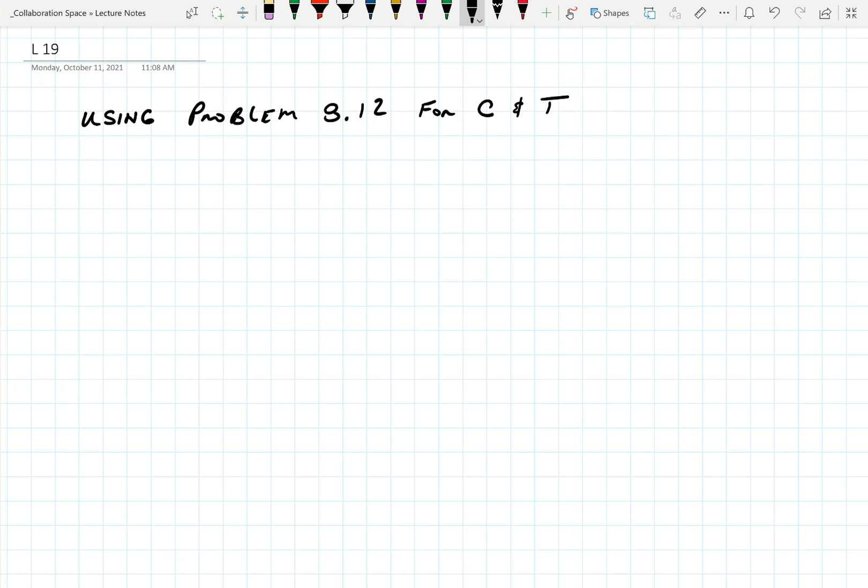All right, so using problem 8.12 for C and I. Determine...

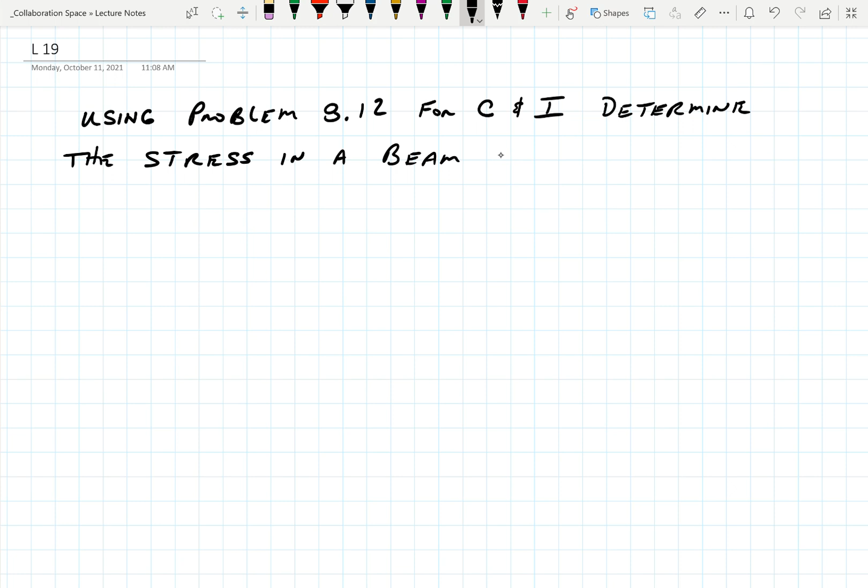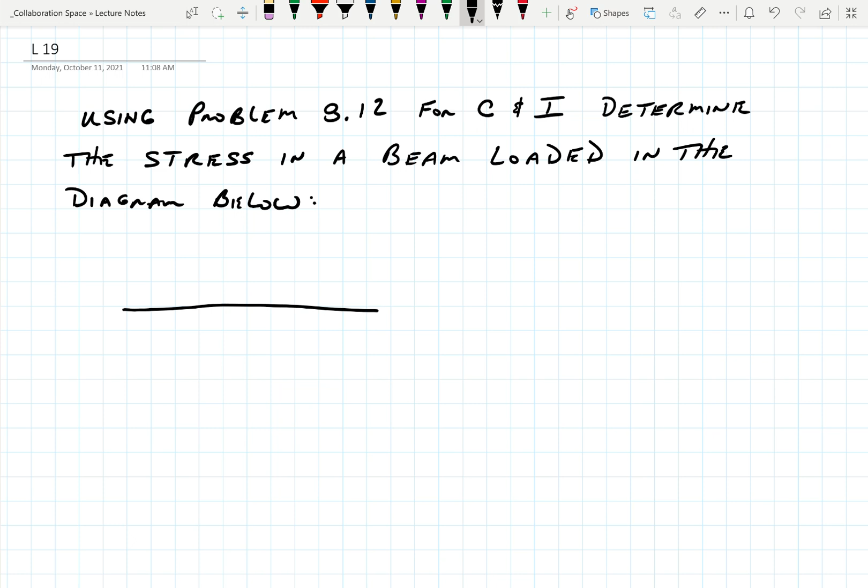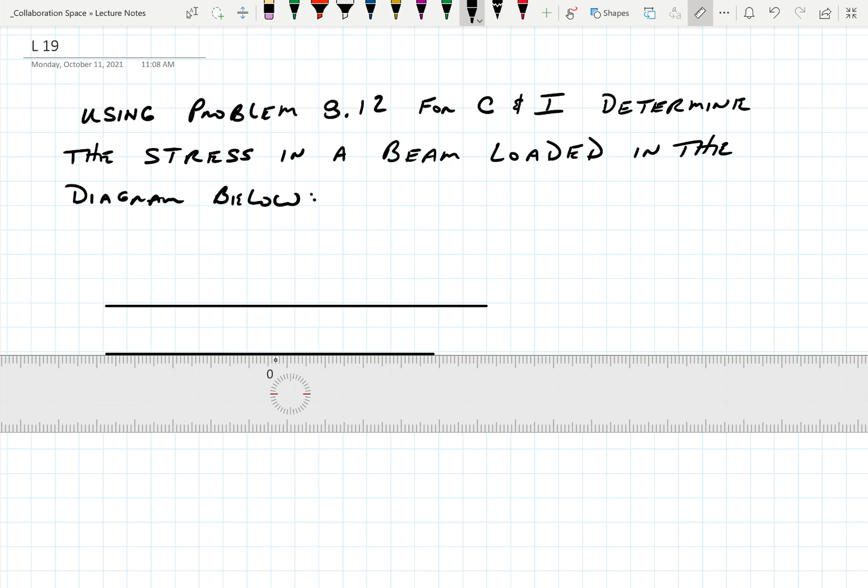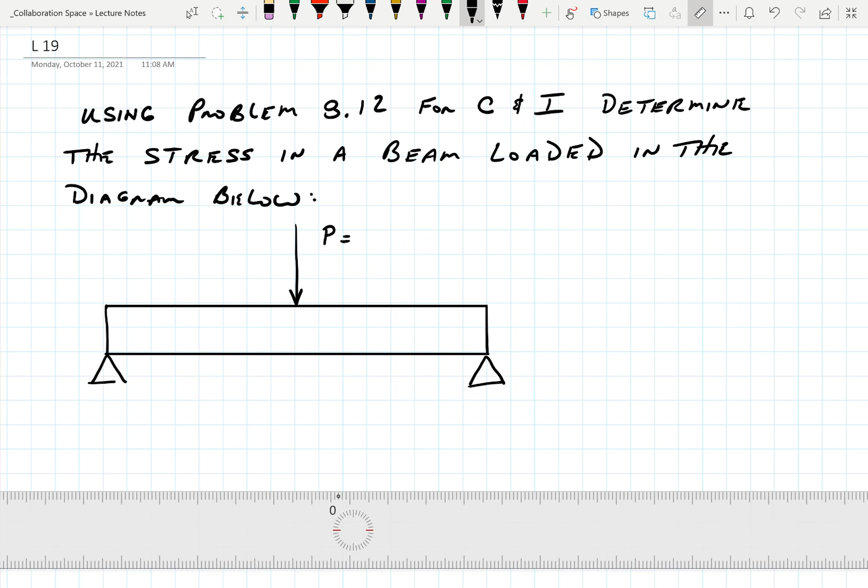Okay, so in this diagram, we are going to do this. I don't like that.

Okay, so we got that. So there's a bunch of things I'm going to introduce you to here. One is, let's talk about the reactions on this, okay?

Oh, I need a number. And we are literally making this up. Patrick, give me a number greater than 10,000 and less than a million. 19,496. 19,496.

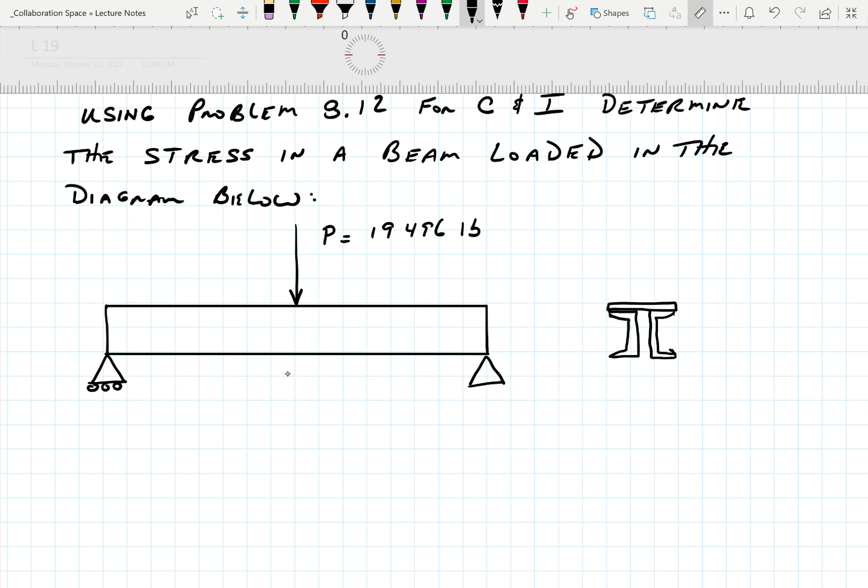Want to do pounds or you want to do newtons? Pounds. Okay. All right. Frank, give me a distance between pieces here greater than 25 and less than 50. 36. Okay.

So, first step to this problem is find the reactions. But I want to point out something here. So, based on the diagram of what I drew for the reactions, what are the two possible things I'm looking for? What type of reactions? Which directions can the reactions be? Force. So I got the force pushing down, P. Your reactions have to be what? You got to go vertical for the reaction of that. But because of the reaction type at the one end, what's that lead you to a possibility of having?

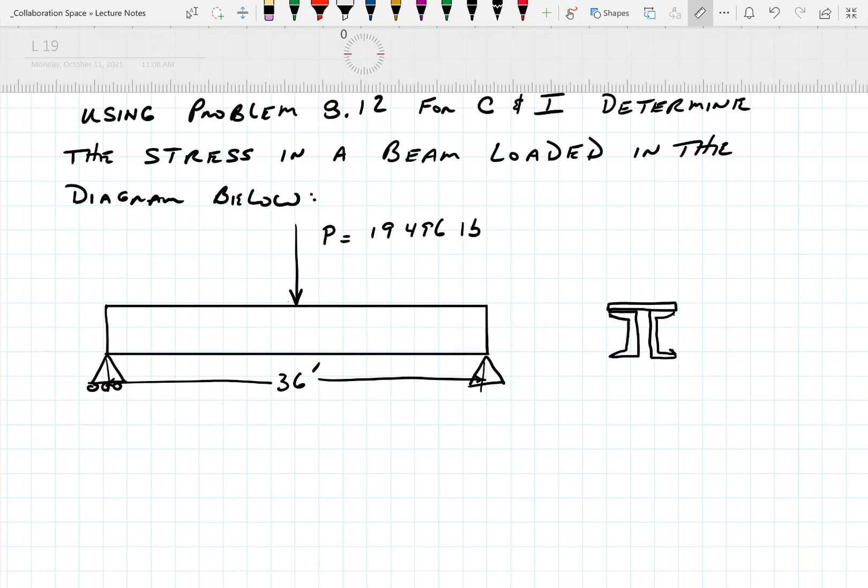All right, so very first thing: free body diagram, correct?

Is from that 19,500. We'll go with that. I want to make it interesting. Yes, you'll be using your calculator. Doing that in my head.

All right, so what's the reactions? Let's go back and do them the hard way, even though it should be pretty easy to figure this one out. But in order to solve for this, we got to do sum of the forces in the y equal to 0, and sum of the moments equals 0, right? There's no x, but you can do an x, okay?

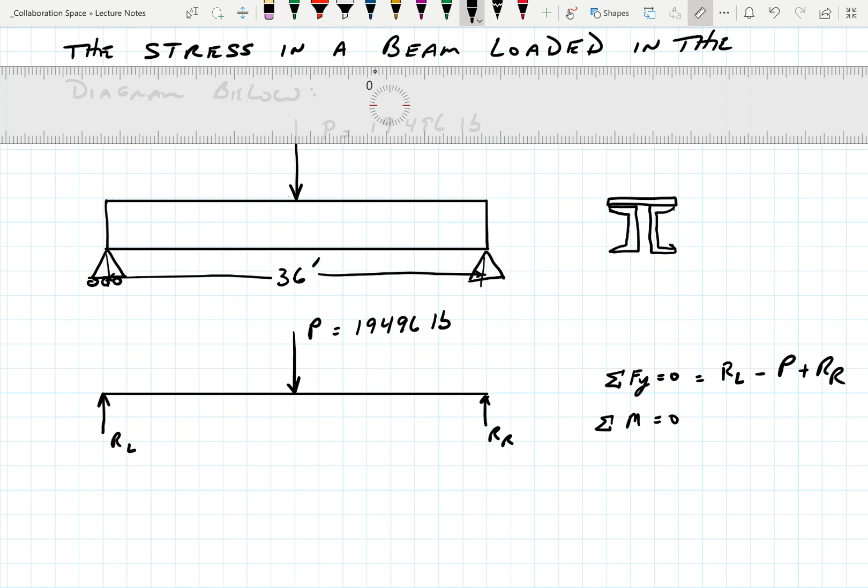So, can I solve for sum of the forces in the y? No. All I can actually do is write this: RL minus P plus RR, okay? So, it helps. Literally, that's the way, when I was a student, that I remember doing it, just because we got used to just doing it. But the reality is, I can't do anything with sum of forces in the x or the y. So, it doesn't help to have sum of forces first. So really the very first equation you should work on is sum of the moments, okay? And we can solve for those two.

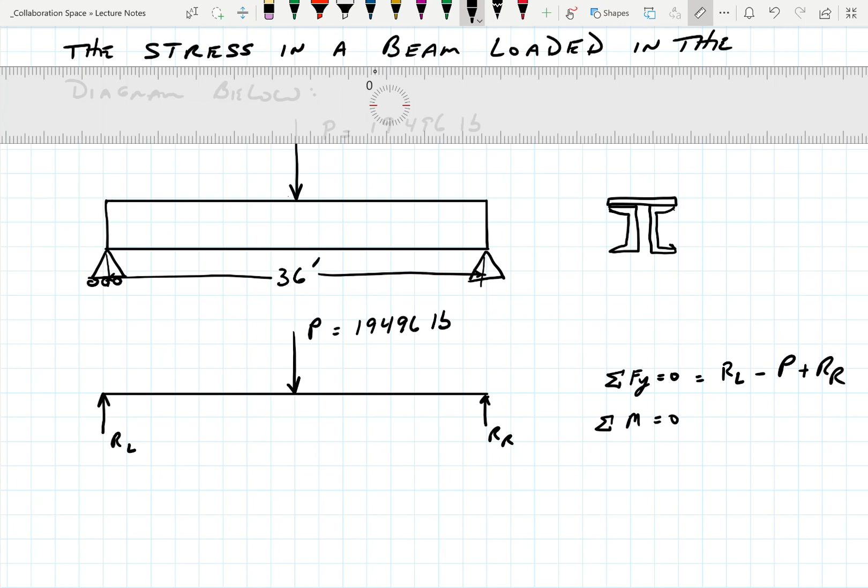Alright? So, first things first. So we got 36 all the way across here, which half of 36 is? 18. At least I was hoping it was 18.

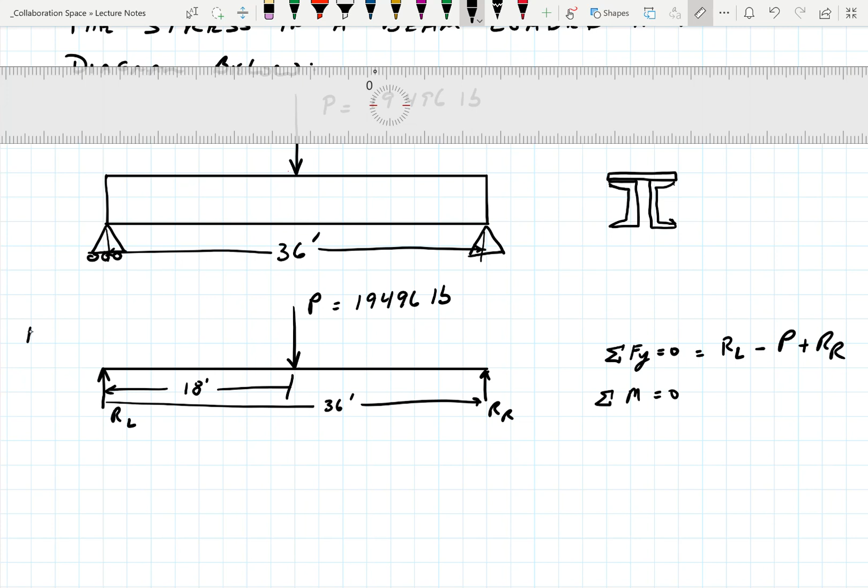Oh, by the way, why is this a free body diagram, but that one above is not? Go ahead, Henry. You're looking at me like you know. I only have the forces shown, don't have the actual physical reaction to it. They see that? He lives.

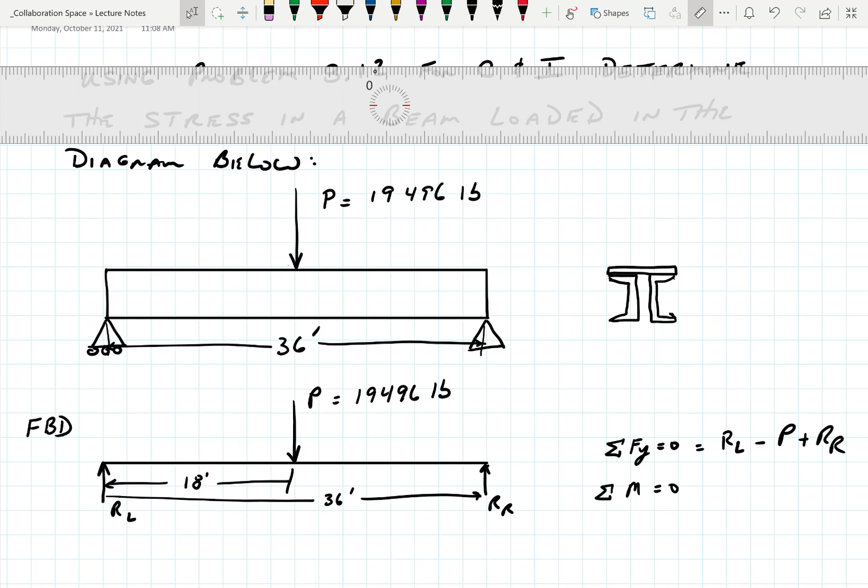So that being said, always, without fail, draw a free body diagram.

So the cool part about this is now if we do the sum of the moments, we are actually looking for P. We know you got to pick one of these to be the pivot point, and I'll give you a choice. You can choose right or you can choose left. Choose one. Let's see, Emma, pick one. Left. Okay, so we're going to do sum of the moments about RL.

Now the other bit to this is we want to make sure we choose a rotation to the moment. You can choose any way you want. Actually, in all fairness, I should have let you choose. Montana, would you choose this one? Yeah, rotation about RL.

Like, even clockwise, I pick clockwise. Would you pick clockwise or counterclockwise? Anybody go counterclockwise? There's no right or wrong with this answer, by the way, just whatever your preference is. So as long as you're consistent and watch your negative signs, everything's gonna work. Okay? If you screw it up, it's because somehow you mess something up in the algebra.

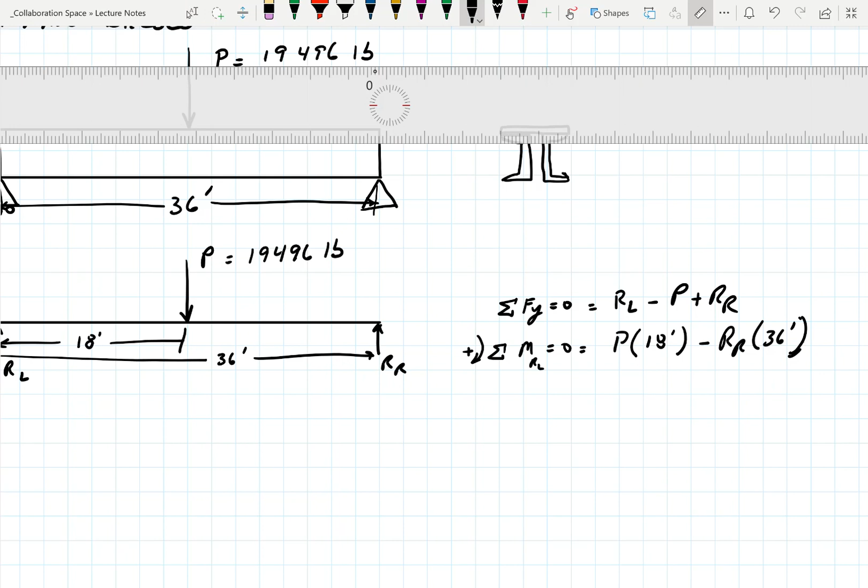Is P positive? Yes. So if you like, you can put it in there or you can leave it blank, just whatever helps you remember the rotation bit. Okay, all right, so we're going to solve for P. P comes over to this side of the equation, and it's equal to RR, 36 feet, divided by 18.

Oh, sorry, working that backwards. We know P, don't we? I'm going to do this. 19,496 pounds times 18 feet minus RR times 36 feet. That way we actually solve for the right thing.

RR is that: 19,496 pounds, 18 feet, divided by 36 feet. Okay? Cool, now I got the right problem. I don't know why I was solving for the force, because I left it blank.

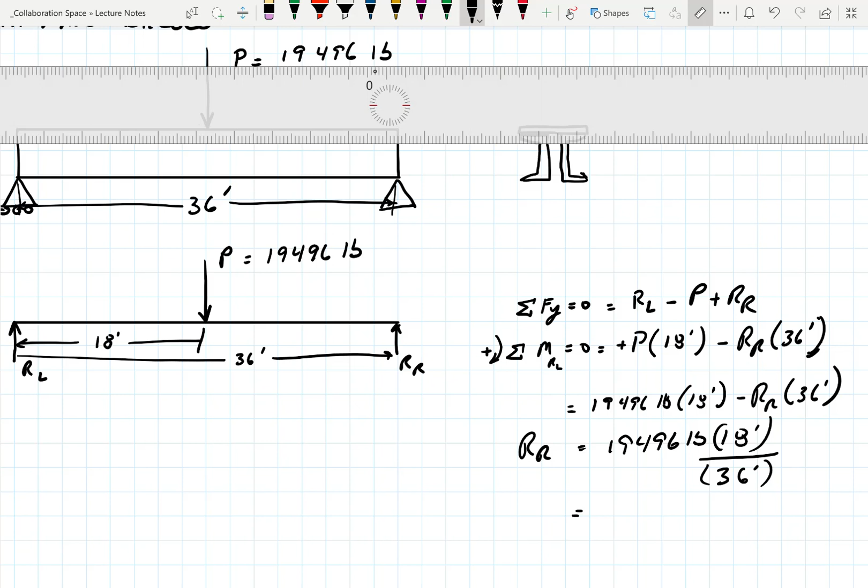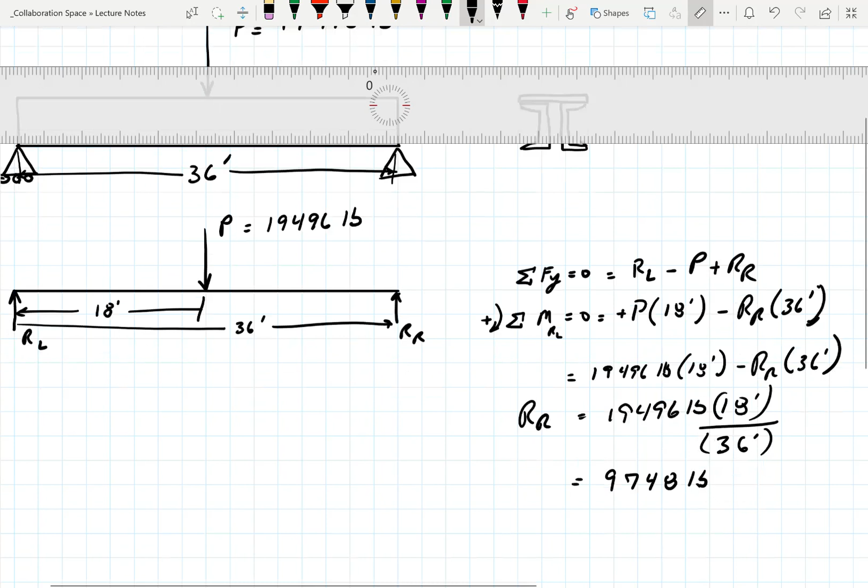So what do we got for an answer? 9,748 pounds. Okay? And then ultimately, you should go back and do sum of the forces in the y equal to 0, equal to RL minus P plus RR.

And we're going to get minus RL plus P minus RR, and we're going to get 19,496 pounds minus the 9,748, and that's going to leave us 9,748 pounds. Okay?

So we got our reactions now, right? Everybody good?

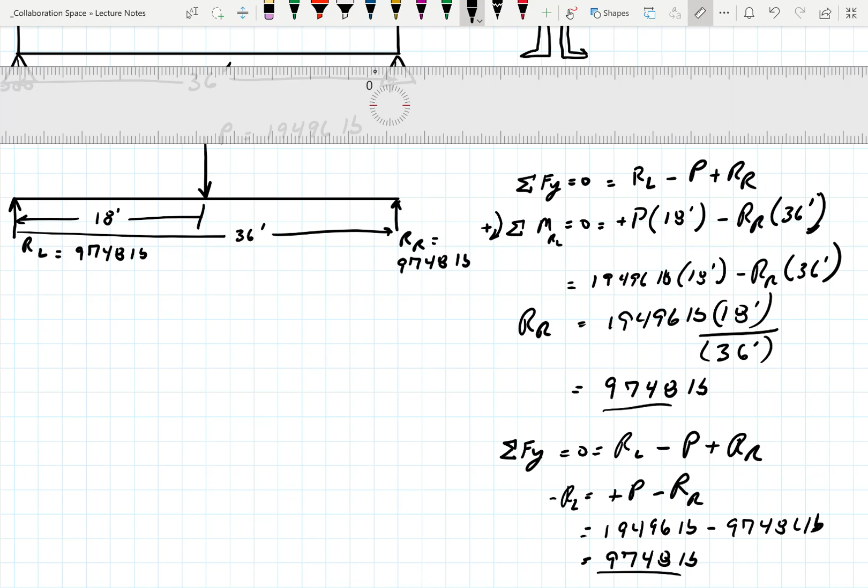Alright, what happens if there's two forces on the top? Remember all that? Well, we take them all in series and we just keep doing the math, right?

Everybody okay? I mean, I picked an easy one for this problem because what I'm going to do next is going to drive you nuts. So I want to start with something simple. Okay, alright, so cool.

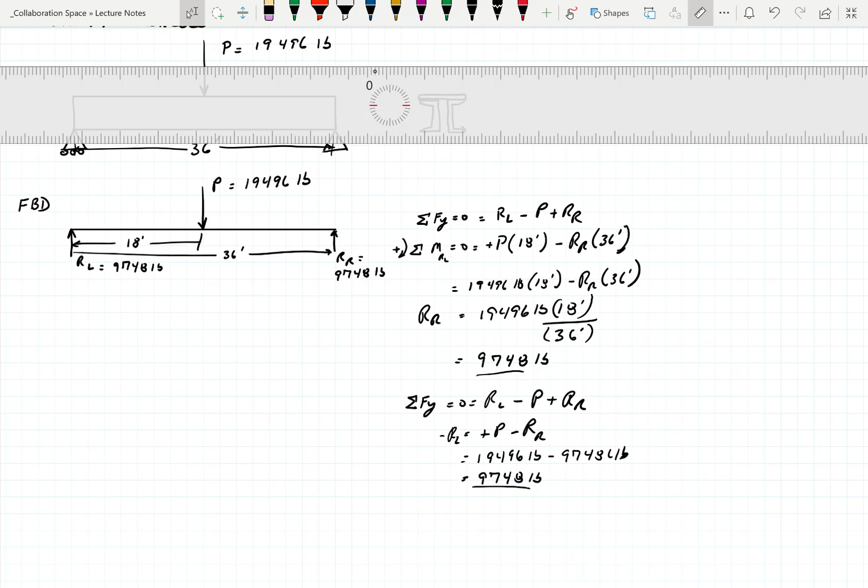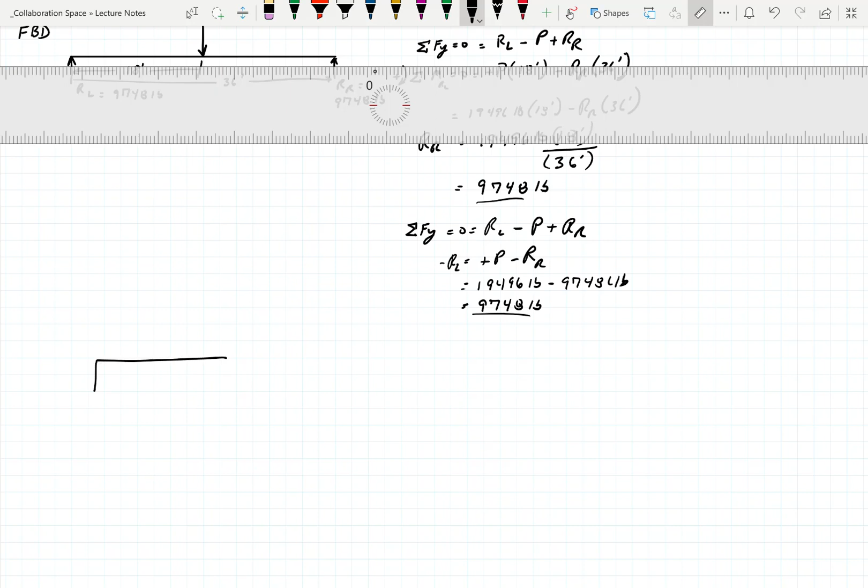All right, so that's our reactions. Now let me do this for a minute. And then we're going to come back and do some drawings of this thing. Oh, I guess I need this.

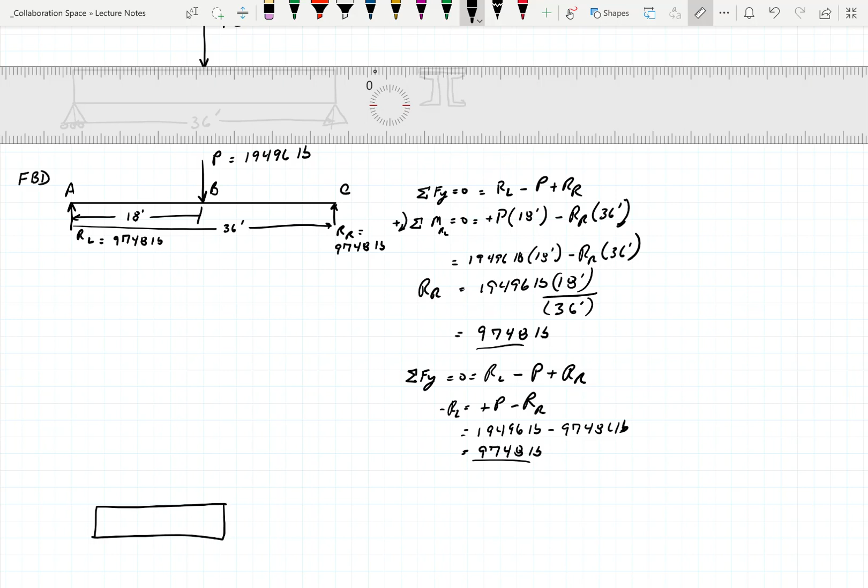I'm going to put an A there, a B there, and a C there, so we got some points of reference here, and you can come out of the way. So this is A, and this would be RL, okay? And this is B minus, okay? So if you think about this, it's B minus, okay? Just before the force. All right.

You don't have to do this in a couple of days to get the hang of this, but I'm going to break it into really small segments as we do this. So if I have a force at B, that's the 19,000 pounds, and I'm trying to figure out what's going to shear. I want to know what's going to happen just before the force causes the shearing.

Do you remember the shear stuff we did back in the beginning someplace along the way here? God, it wasn't that long ago, although it feels like 900 years ago. But that's anyway. So that force at B, we'll want to try and slice that beam in half. Someplace out here, I think I'll do it like this.

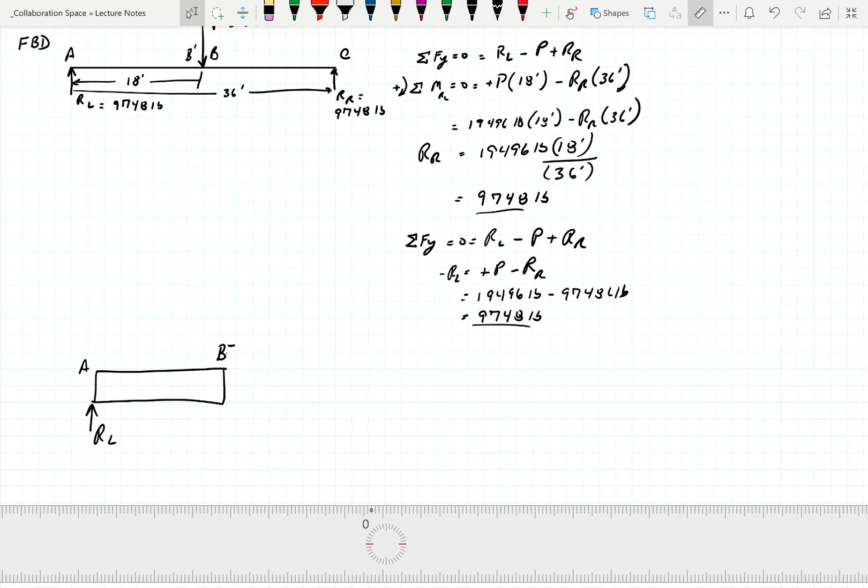We'll put a red mark—there's just a little bit of material left out here. That means we have this fictitious force out there, P. And that's really at B.

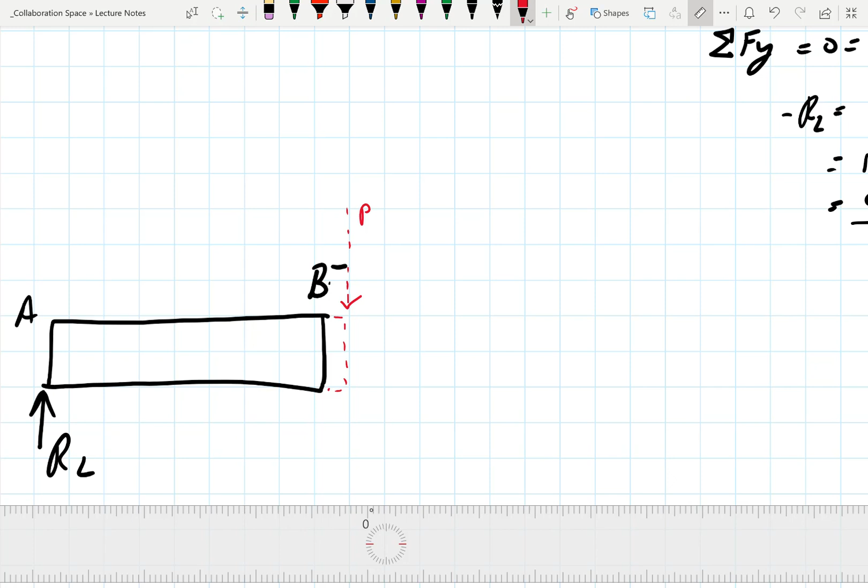But just before that point, what's the reaction there? Is anything happened to that? We just cut it, or just imagine it beforehand. It should be the reaction of RL. So literally what we're gonna do is this.

So watch where the fun comes in here. I want to draw up here—no, I'm gonna do it here. We will start right here. Oops, let's do black.

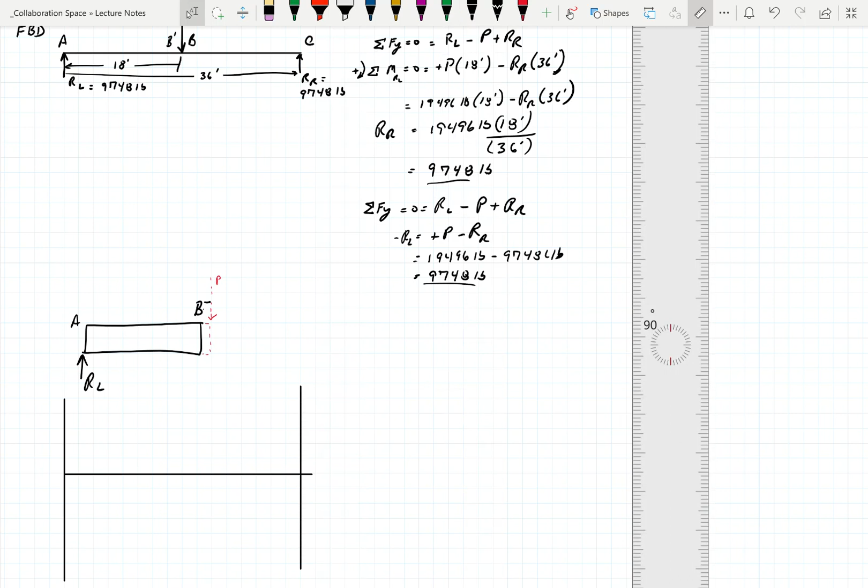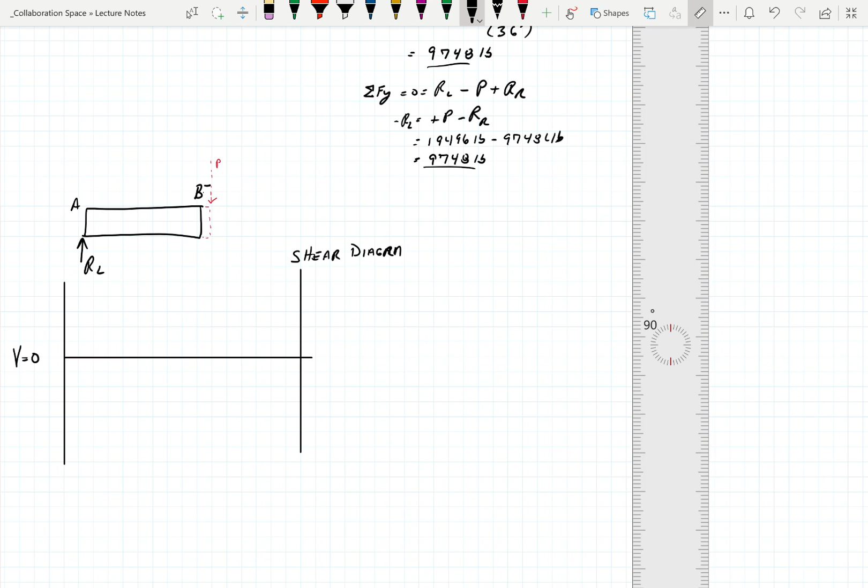So this is a shear diagram. We start at 0. At point A, here, let's do this—we go up. No, let's make that bolder. We go up, and then we go over until we are here.

So everything across that beam until that point of B. So B minus, or B prime—no, what did I put it down? I put B prime. B minus is above B prime. B minus, so just before B happens, the force at B. Everything still stays the same. There's no other forces acting on that.

So the uplifting force of the reaction is going to lift that whole left side of the beam up until we hit the force at B. Then it will start going the other way. Cool. Now we can actually calculate that.

So we want V at A, which is really going to be RL, equal to 9,748 pounds. It's the only force acting there. So literally it's going up to here at 9,748, and I usually put the units down here so you don't have to fight with it.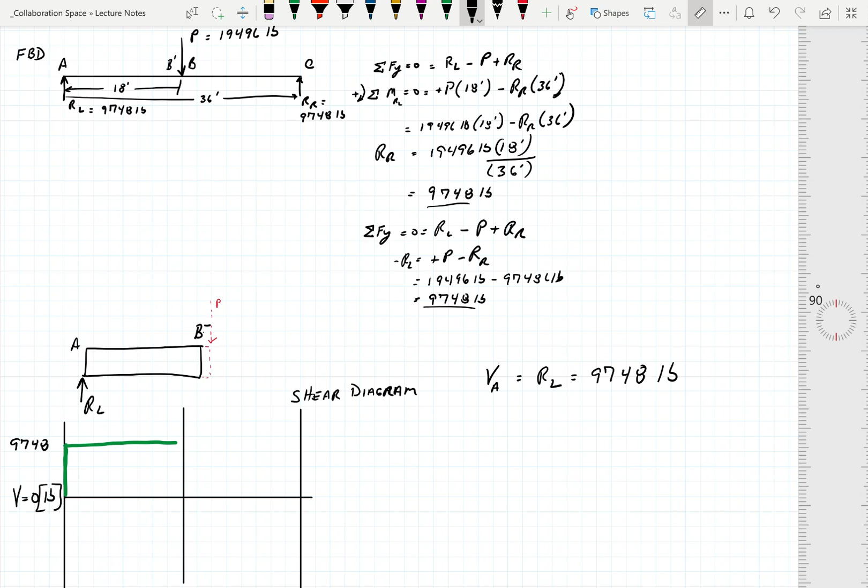But when I get to V B minus, we're still equal to RL, 9748 pounds. But here comes the kicker. So here's VB, and it's going to go to VB minus, and we got the P now. So VB minus is positive, and P is negative because that's the direction it's going.

That reminds me, I didn't do that up here, did I? That's positive. So identifying which direction is positive so you know how to get your signs up.

So now I'm right at the point where P's acting on this beam and it's going to slice through it. Doesn't really, because if it did, we'd never get anything made. But we act like it slices there. I'll show you all why in a minute. But if it's soft enough, it will actually bust through.

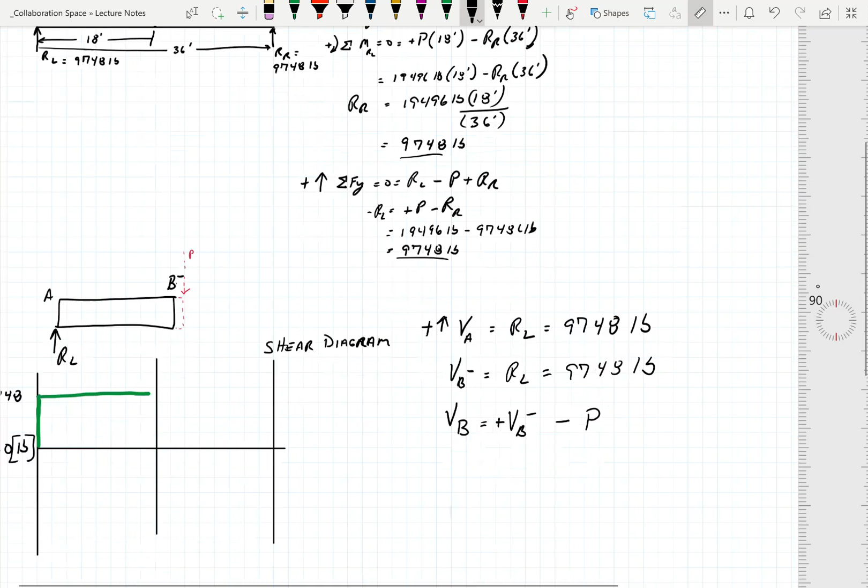So now with P added to this equation, we're looking for V at B, so it's going to be 9748 pounds minus 19,496 pounds. And what's that going to be? Anybody want to guess? Negative 9748.

So that literally means this: we're going over there, and we're going down, and we're going to start that way.

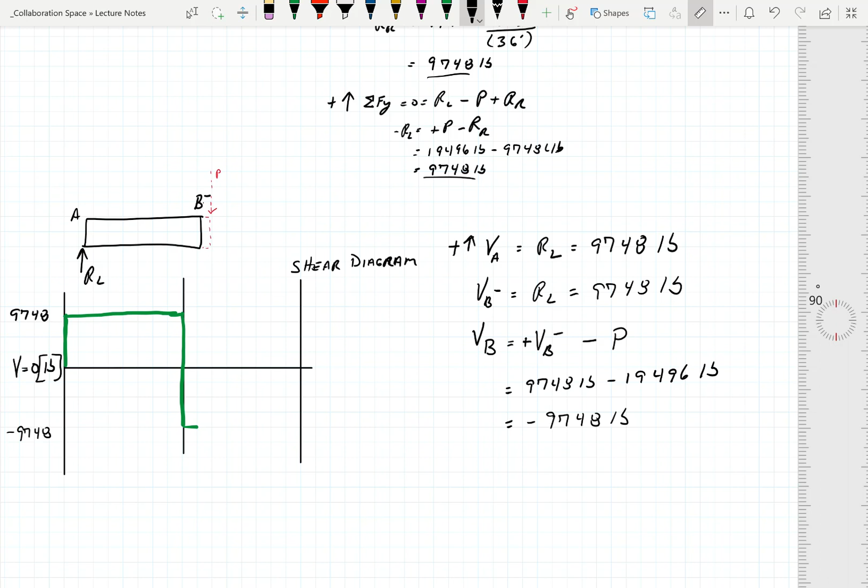Okay, now this is what's happening with the diagram now at RL, P, okay, and that's at A, and that's at B. And that's the diagram that goes with that for the free body diagram, okay?

And the result of that free body diagram says I got a lot more P than I got R, so I'm going to drive down to what was the neutral axis, right? Zero axis of shear. Make sense? Okay.

Now, as we move to the right on our beam, what's going to be the result of all this? It's going to look like this, okay? And then we're going to come back over and we're going back to zero, okay? Actually, wouldn't draw the arrow in there.

So let's do the math that goes with this, okay? So V at C is equal to, well, let's do this. V B plus is equal to VB in this case, okay, which is equal to negative 9748 pounds, okay? And then V of C, so this is point C, that's B, and that's A.

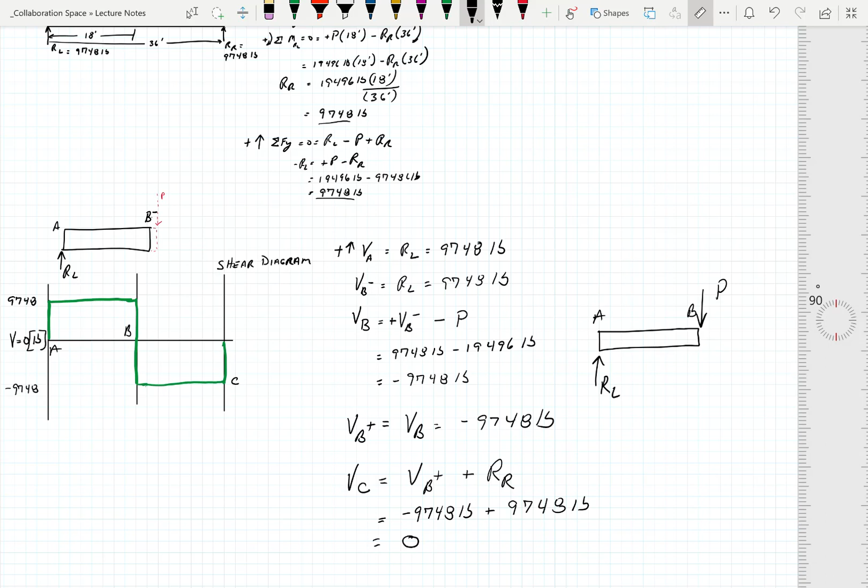I could have done this problem without this diagram. Okay? It's that simple. But the trick is, they're not always going to be simple. You need to draw the diagram.

Okay? What I'm looking for is the maximum moment of this problem due to bending. Okay? So I'm going to go for sigma is equal to MC over I. The I and the C we found from that other problem. But I'm looking for the max moment.

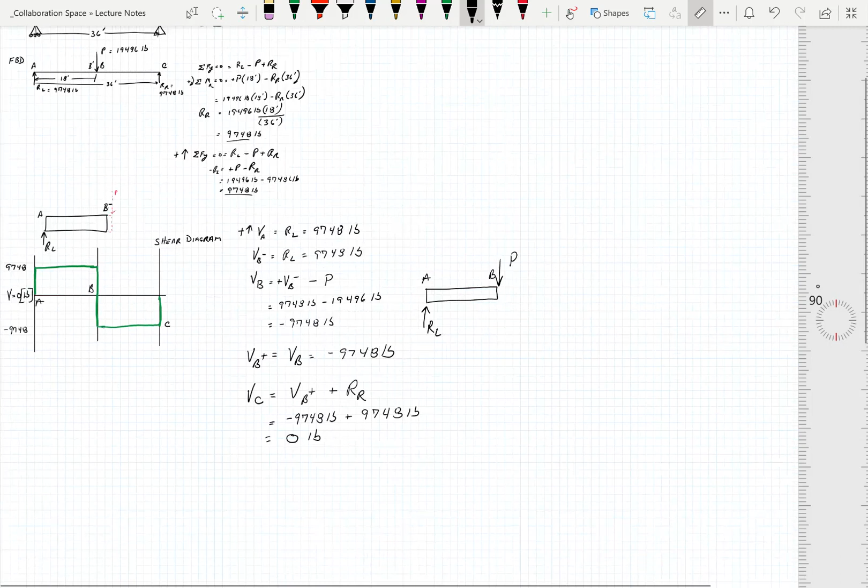Okay, now, in order to get the max moment, it will always occur wherever the shear crosses the zero axis. Okay? So it's not going to occur out here because we got nothing really going on. But right there is a good likely spot to have the maximum moment. Okay, now, bring back my trusty...

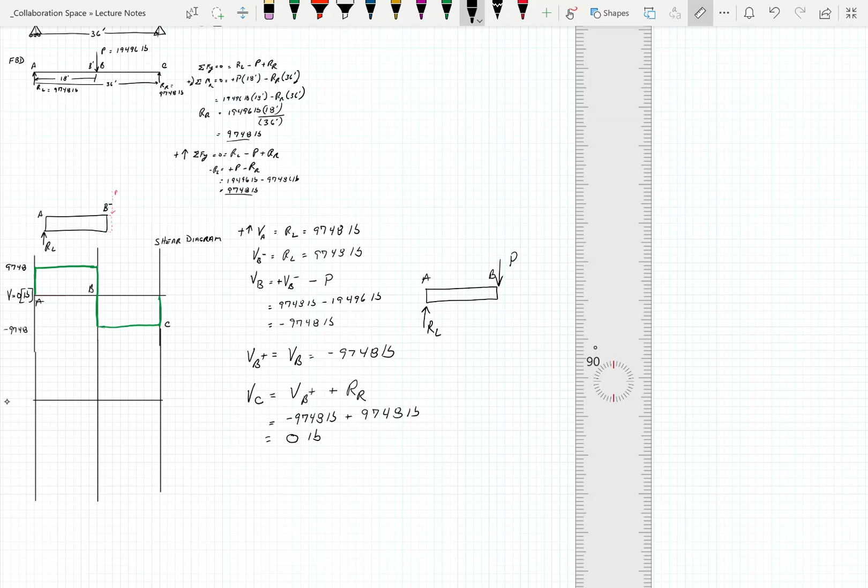All right, now life's going to get a wee bit more complicated. So let me zoom in on this. That's our moment.

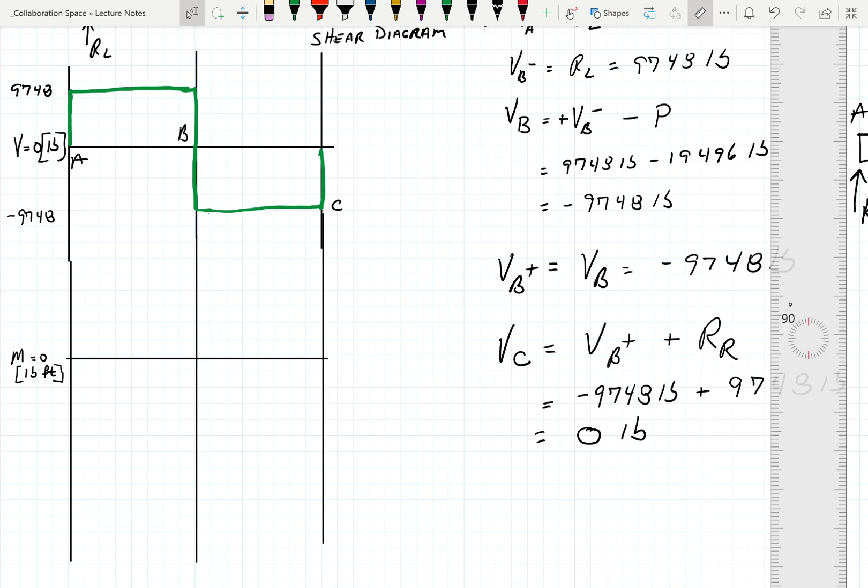Equal to 0. This is in pounds, feet, right? Because we were using feet earlier. Okay, and yeah, hang on to you for a minute.

Now, I want to do this. I'm going to draw... okay. So, let me zoom in on that so you can see it a little bit.

All right, in order to actually do this, this is one of those games they tried to get you to learn in math about doing limits. Remember that stuff? But you remember the phrase, right? Okay, so...

If I'm taking a moment about the left-hand edge, okay, and I'm at some really small infinitesimal distance, in this case I pick 0.001 inch, and I got a 36-foot beam, okay, I don't really have any moment like that, okay, but I want you to get used to the concept of what's happening.

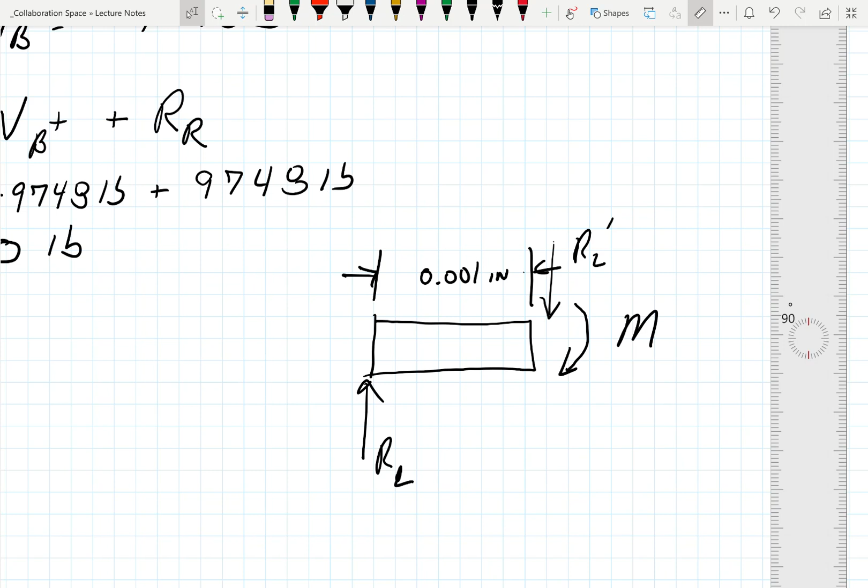By the way, that reminds me of one of my impromptu chats with the civil students today. If you folks are confused in any class, ask questions. Ask questions to the instructor, come to me, see your advisor, ask your peers, but get some help. No one does this on your own. And if you think you do, let me tell you some other horror stories, okay, but not today. But make sure if you're struggling, that you're not struggling by yourself. Come struggle with some friends, okay? And at least we can help you. The other thing I know is I got to talk to the tutoring director today to find out where all the tutors went and what we're doing about tutors, okay?

So now we're doing the moments, okay? My moment at L, or at the left side here, using RL, is going to be equal to 0. If I was to do this out, I got RL times 0 feet, okay? There's no distance there, so there's no moment, right? Even though I have 9748 pounds times 0, anything times 0 feet is 0, correct? Okay, so it's a whole bit with trying to approach where we go, all right?

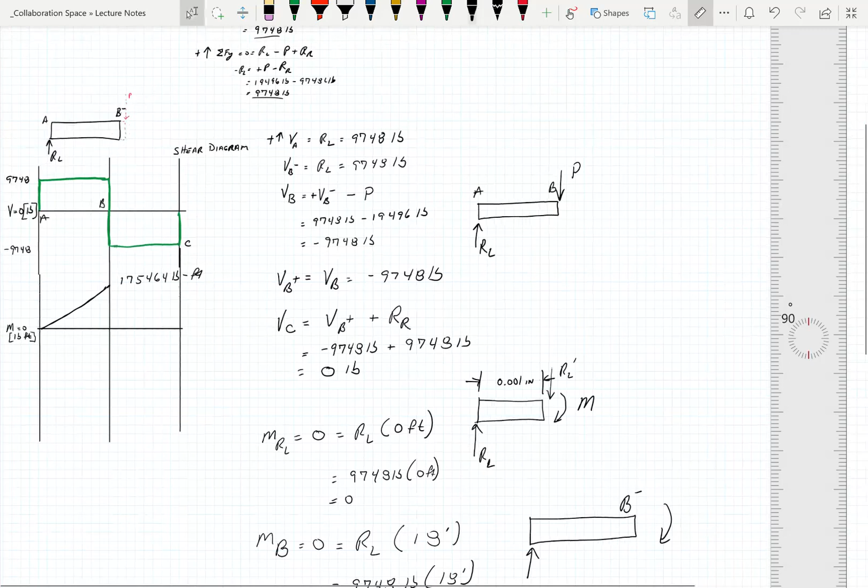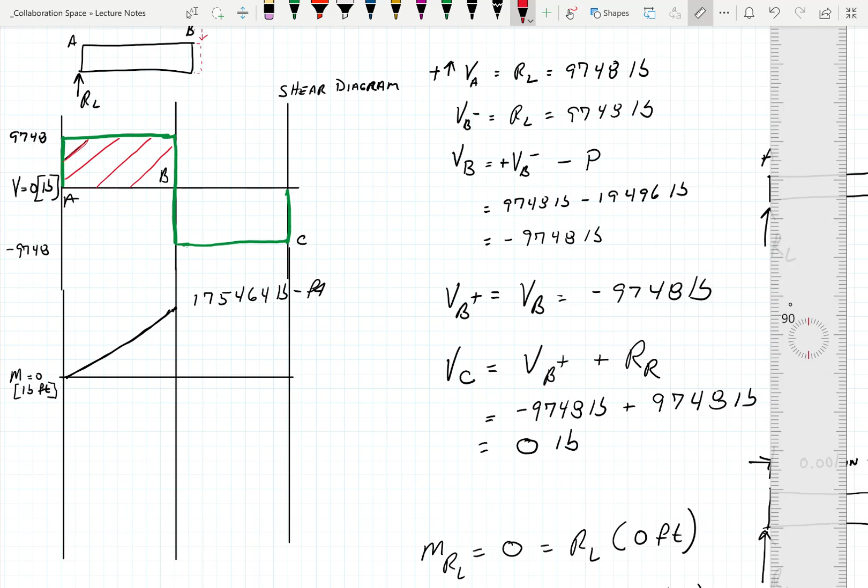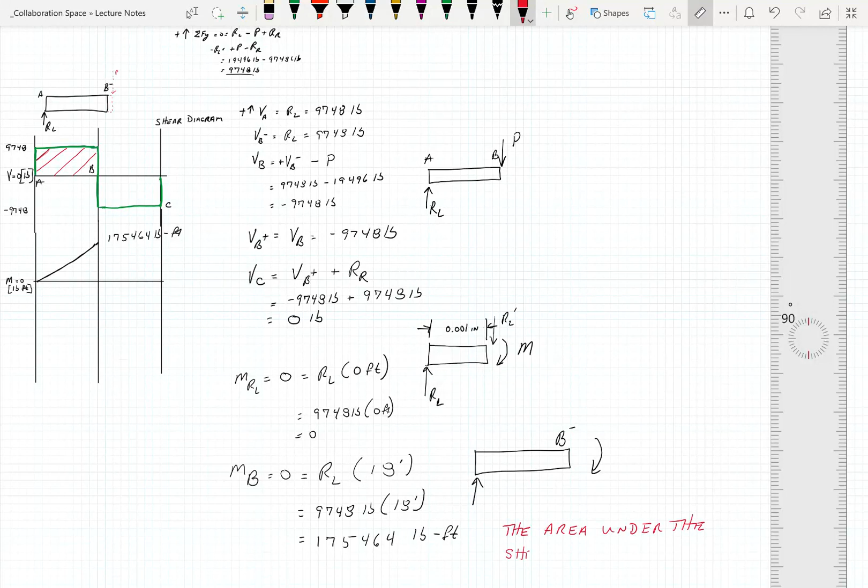Now here's one of the coolest things about strength of materials, and you may or may not like it, but I don't really think there's much I can do about it if you don't like it. The area of the shear is equal to the value of the moment. Okay? And the proof in that little pudding is... okay? It's as simple as that.

Now, we have a few minutes left here. The next little step is this. Calculate the other side. This one's easy. We went up and we went down. Okay? So what's it on the other side? If we were to do it, it's the same equation, but with the negative sign. Okay? So in essence, they always wind up back at 0, too.

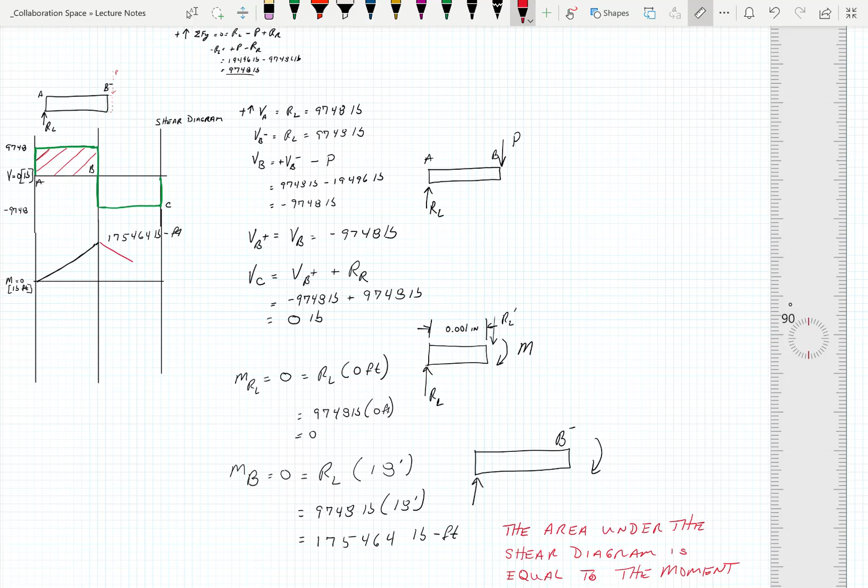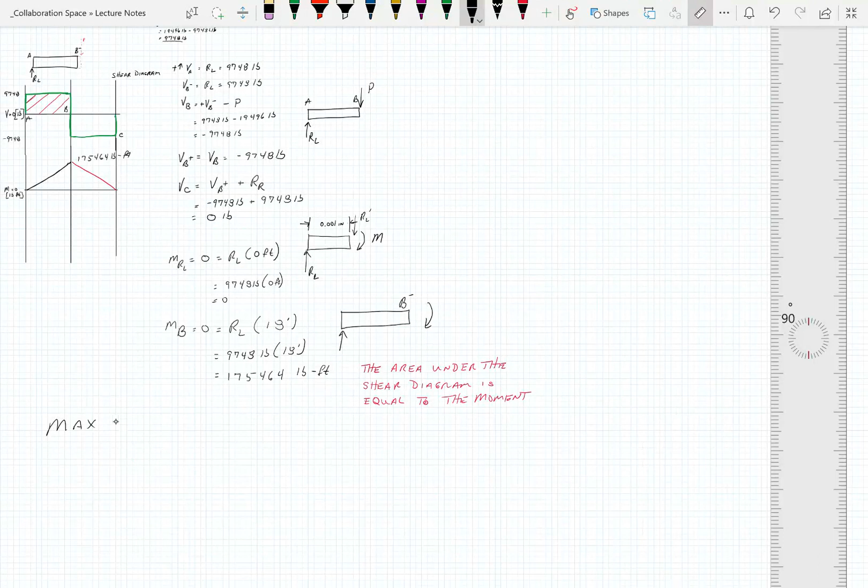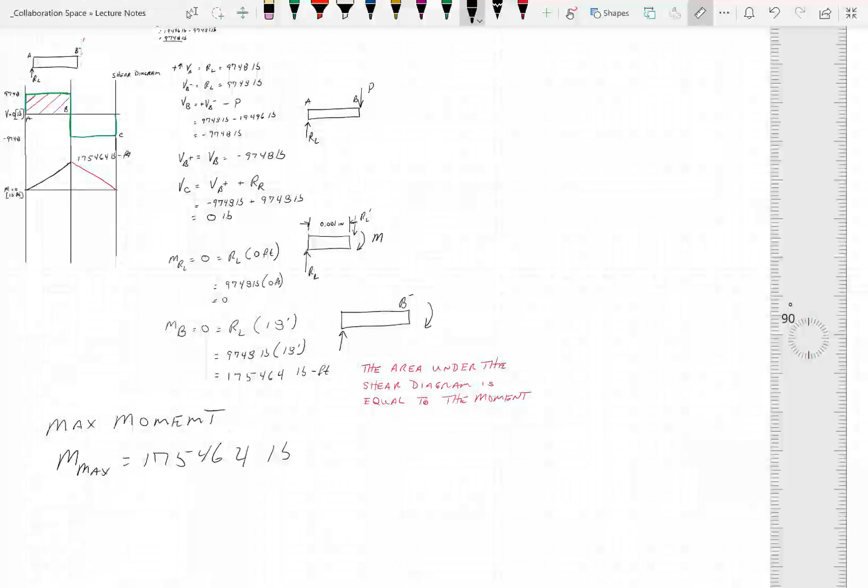Okay? So the coolest part about this is I have a max moment, with M max equal to 175,464 pounds feet. Okay? So literally I can come in here now and we can do sigma is equal to max moment times C over I. So 175,464 pounds feet. Anybody remember the C value we had?

The Y, 11.8 inches. Yeah. Okay, so we got to multiply that times 12 to get it in feet. And our I for this was... no, not multiply it, divide it by 12. How am I thinking here? Divide by 12 inches gives us feet.

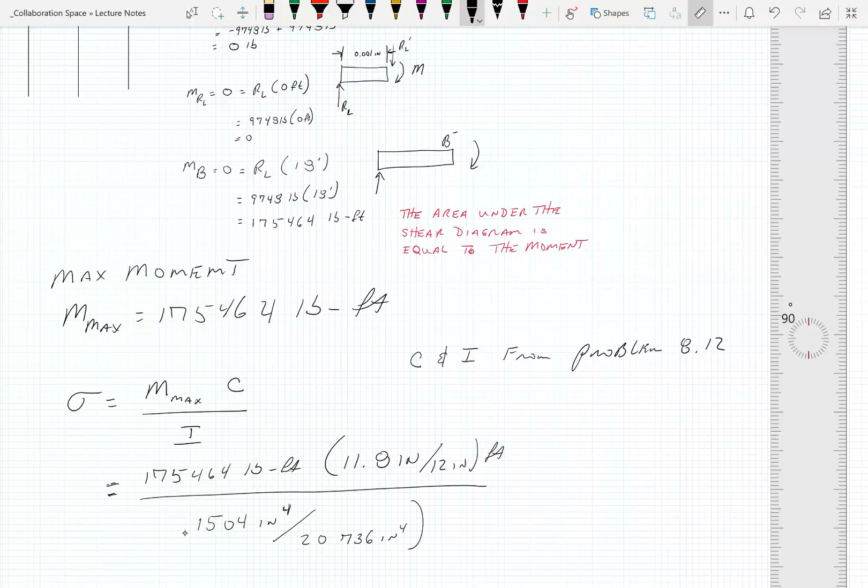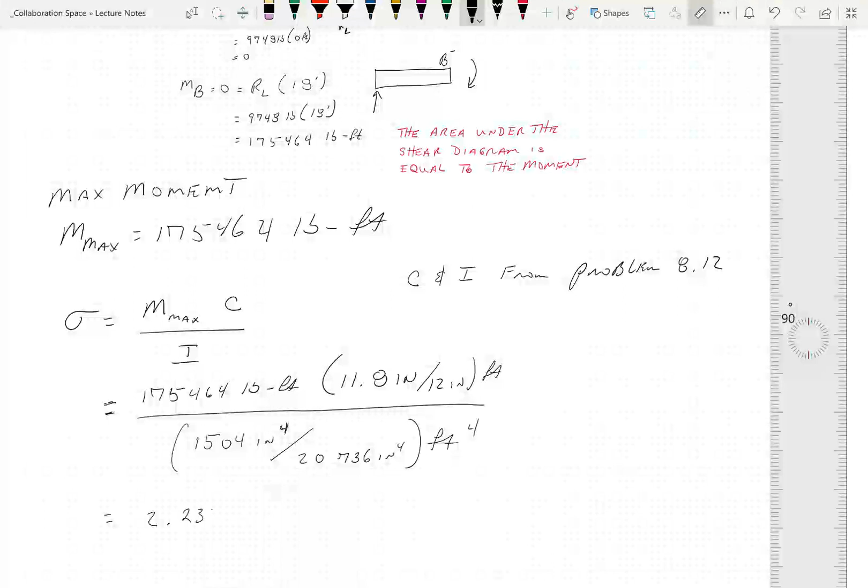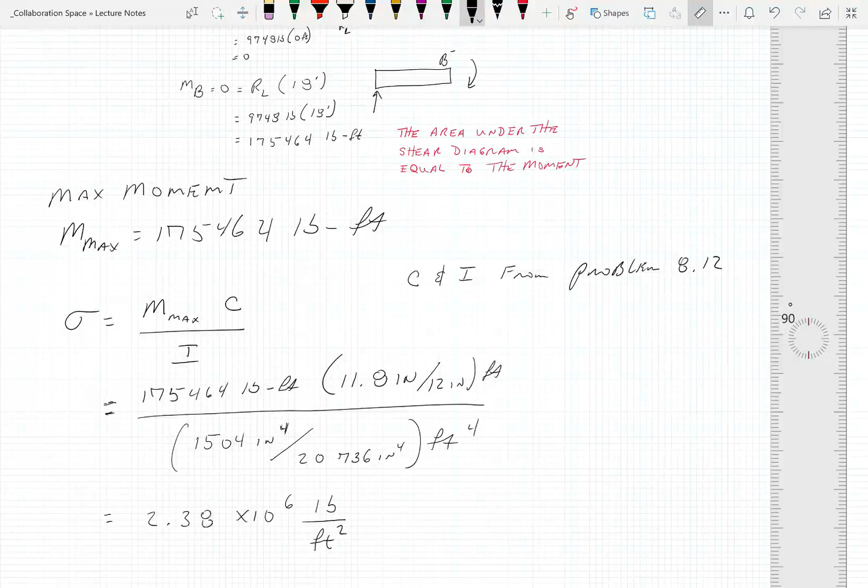Punch that number out really quickly and I'll let you out of here. Okay, do some rounding there and give it to me in... 2.23. Okay. Normally we take those into pounds per inch squared, but this works. Okay. Because where we had the units and what we started with. Normally keep track of your units from the beginning and you're better off. That's second, it's just 2.38. 2.38. Or I can go to the next. No, that's fine, 2.38 is close enough for government work. Okay. And that's our stress in this.

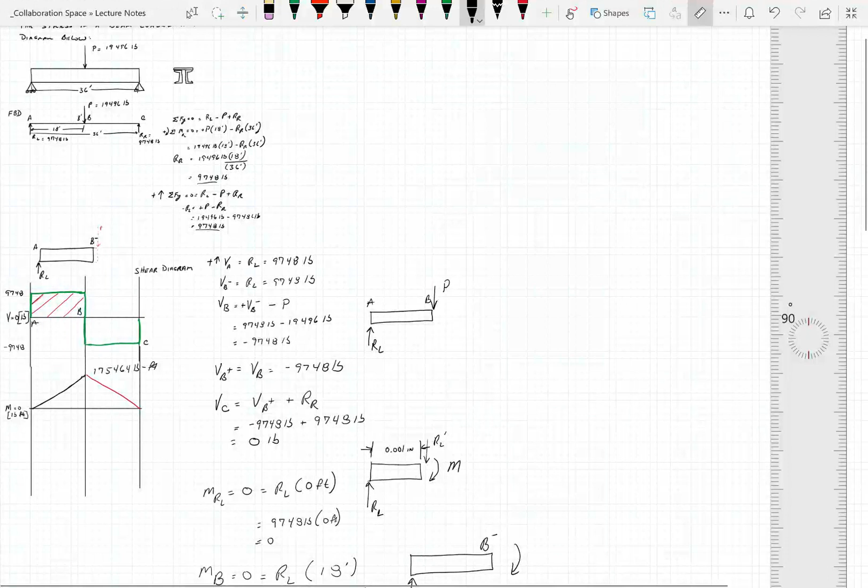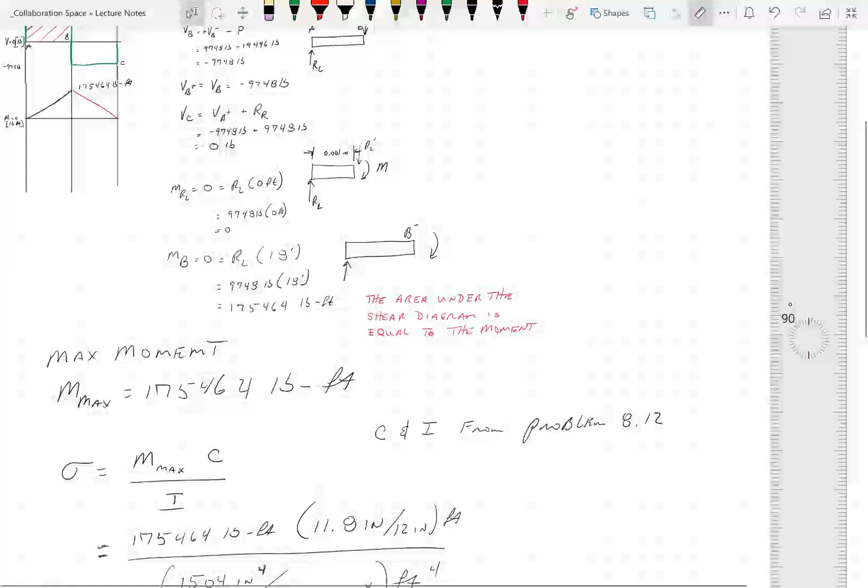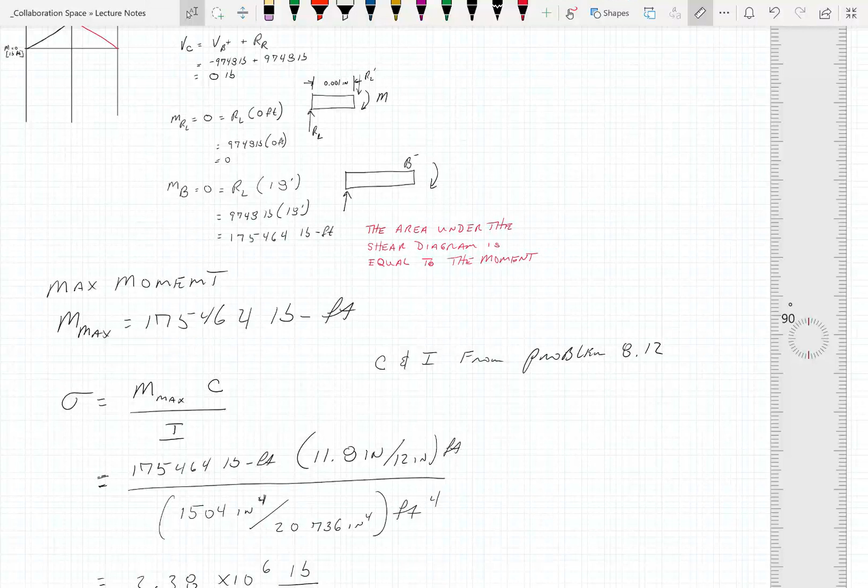Quick review, and we'll do this again and again till you get it. Free body diagram, shear diagram, moment diagram. Find your max moment. Get your max moment, then go plug it into the bending stress equation. Pretty cut and dry. Doesn't get any more exciting than that. Just gets more difficult. Okay. We will do these again and again, so don't panic if you didn't get it today.